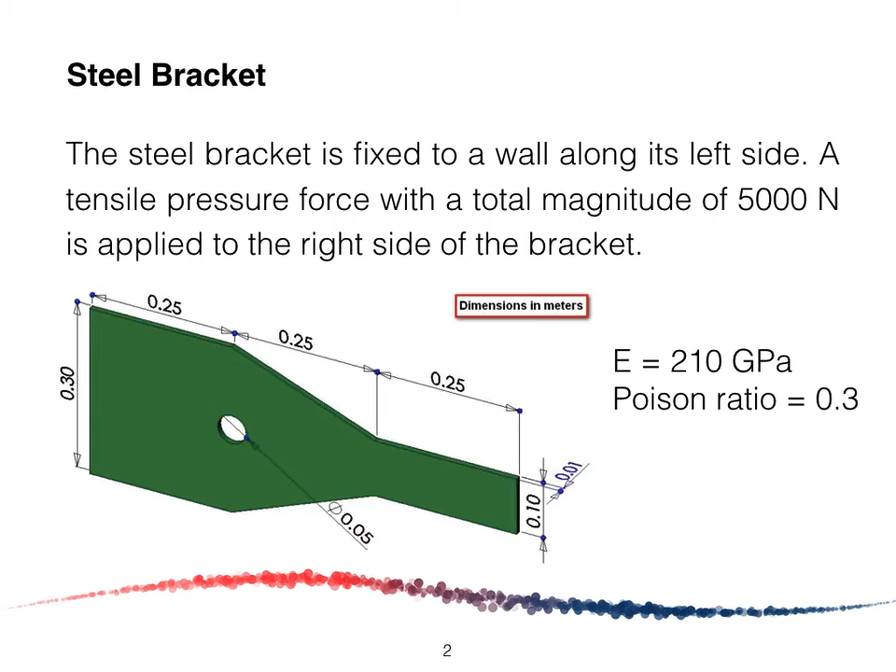So first, we are going to create our part by double-clicking on the parts and we name it as plan. Modeling space is 2D planar, type is deformable, and the base feature is shell. Approximate size is 5. So in this case, we have sketched the bracket with the symmetric horizontal position.

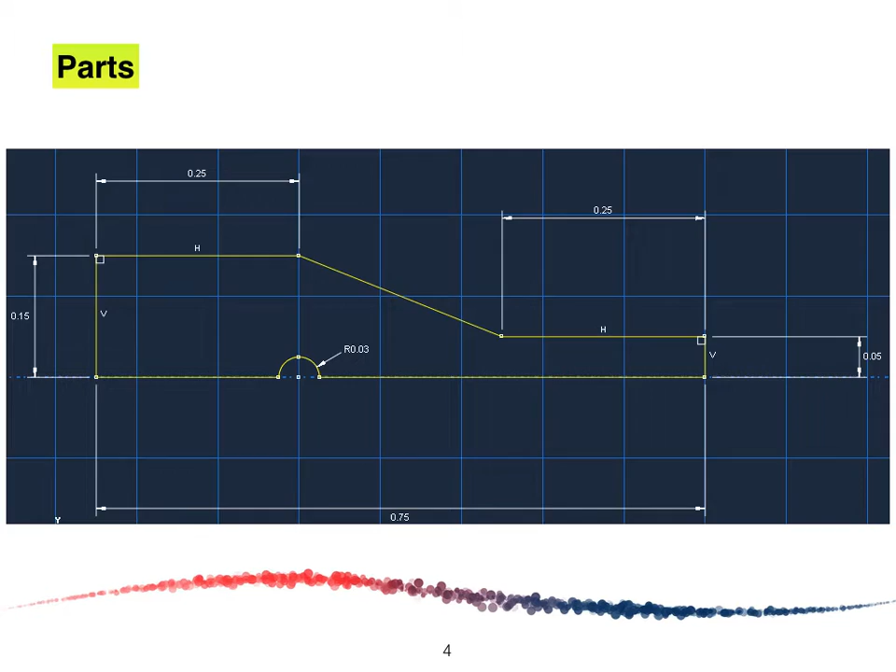So next, we are going to define our material. In this case, we double click on the materials and the edit material window will appear. Click on mechanical, elasticity, followed by elastic. So we may specify the Young's modulus and Poisson ratio in the example here.

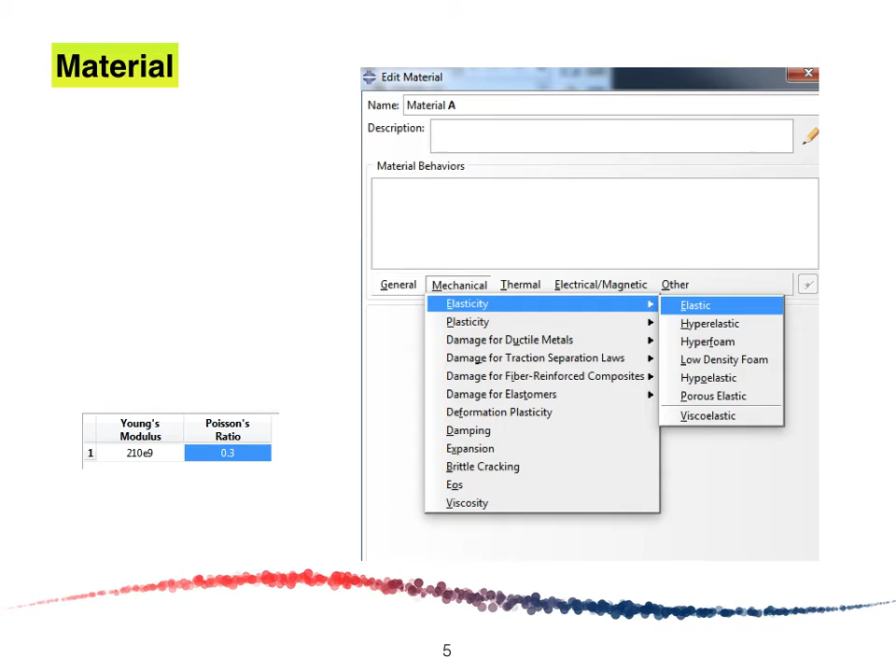So the next part is double click on the section assignment, select the whole plate and click continue. After we click continue, edit section assignment will appear. Click on the section and the create section window will appear. We are going to select solid with homogeneous. This is because the bracket has thickness and this will specify the thickness we require.

So after that we click continue and the edit section window will appear here. We are going to tick the plane stress/strain thickness and specify the thickness which is required in the question. After that click OK. Once you have clicked OK, the edit section assignment will appear here again. In this case, the type and the material are specified and we click OK.

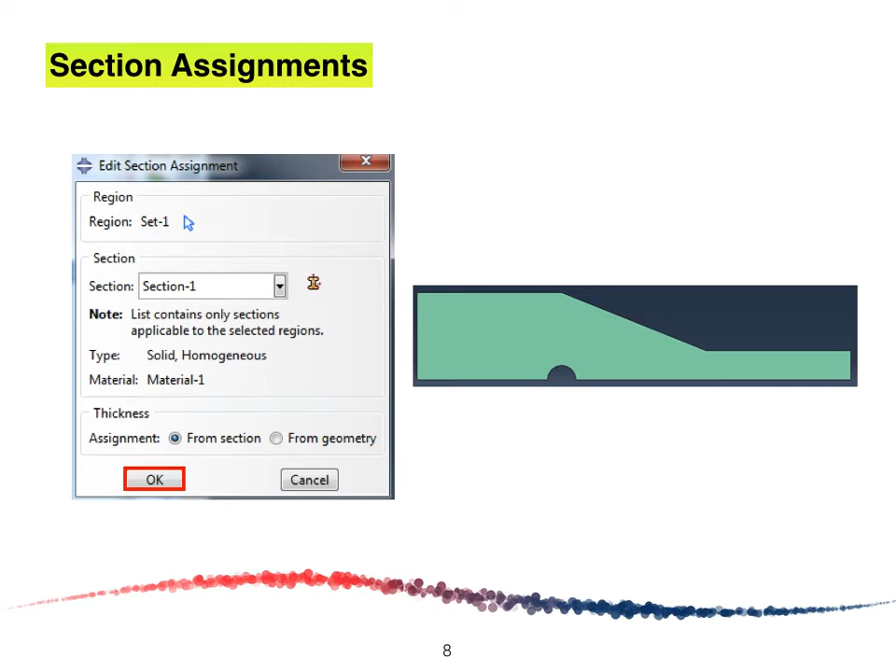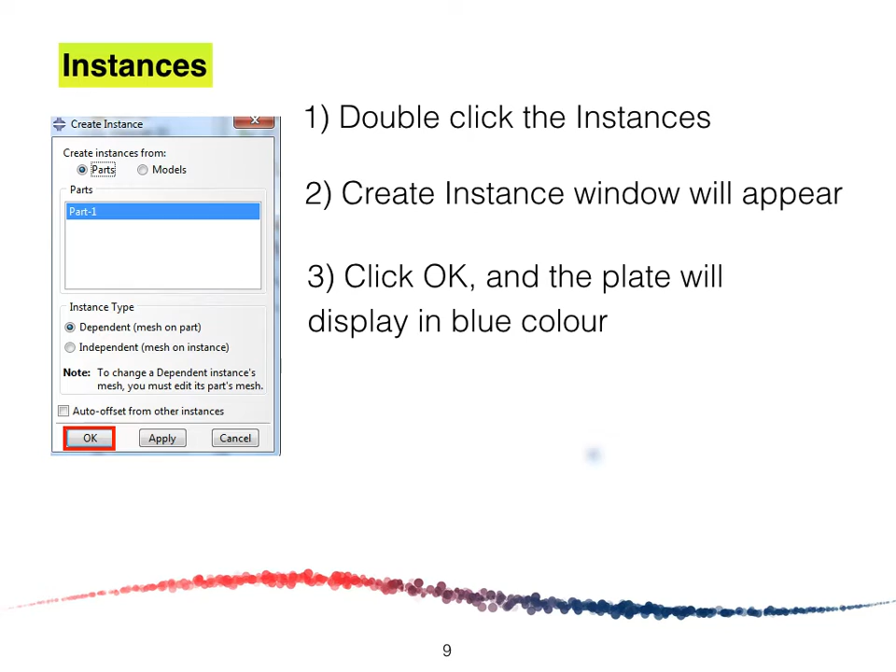So once we click OK, the bracket will appear on your screen if everything is properly defined. Next is to double click the instances and the create instance window will appear on your screen. We click OK and the plate will display in blue color.

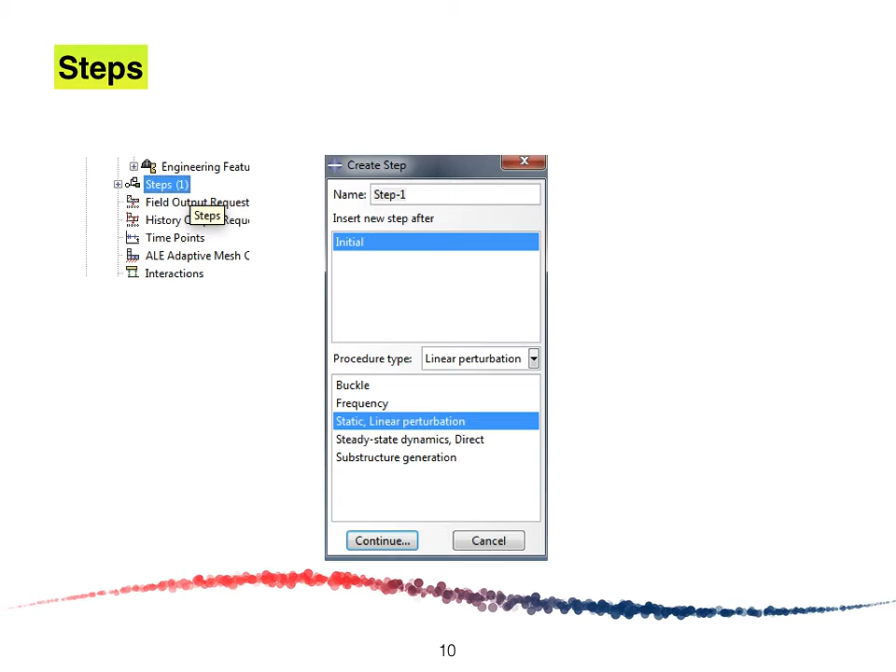So the next step is to define the step. Double click on the step and the create step window will appear. We select linear perturbation and select static. This is because before we create our load, we need to create this step first. Click continue. After we click continue, the step window will appear here and click OK.

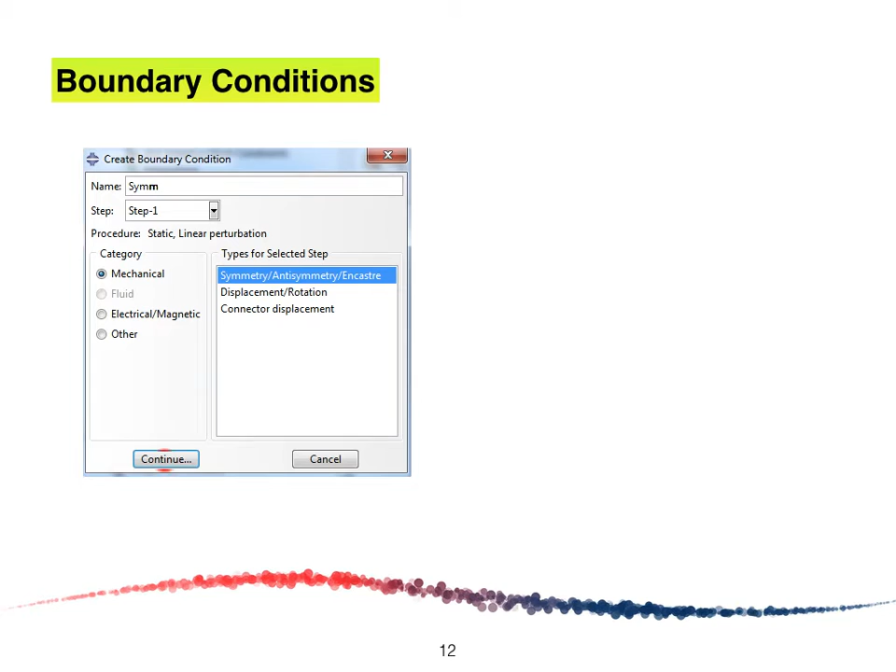So next is to define our boundary condition. The first boundary condition is the symmetry about the horizontal axis. Select mechanical and symmetry, click continue. Then we select the two horizontal lines as indicated by the red arrow and click done. The edit boundary condition window will appear, and we are going to select the Y symmetry.

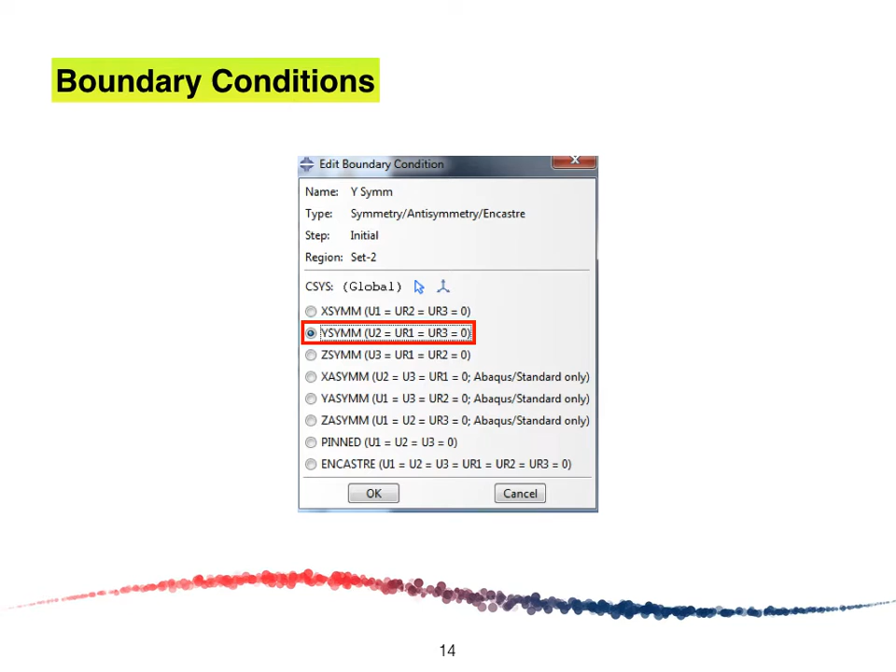This is because the bracket is symmetric about the horizontal axis and it will only move in the horizontal direction but not the vertical direction. Since it does not move in the vertical direction, U2 should be equal to 0. So therefore we select Y symmetry followed by OK.

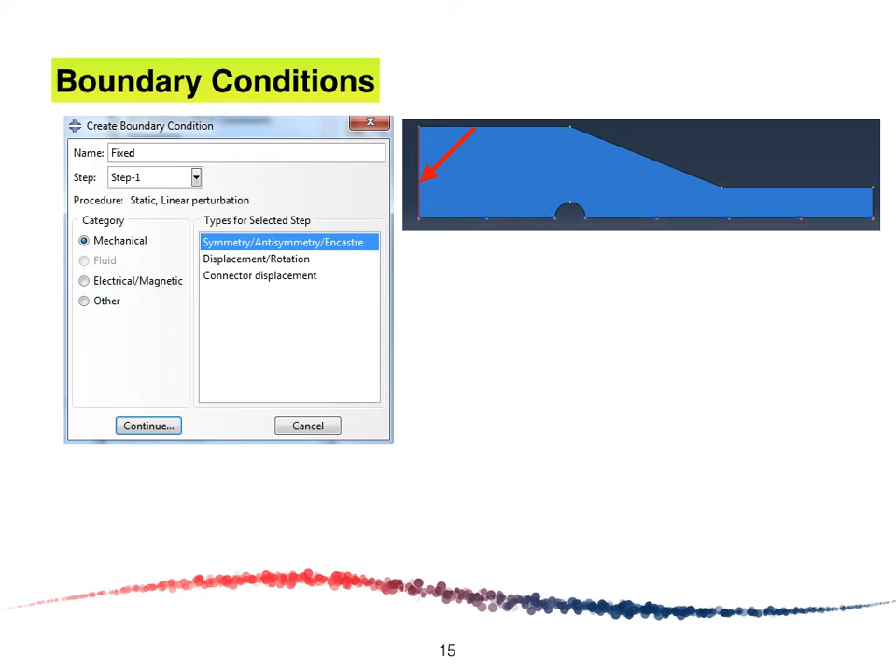So the next boundary condition is to apply the fixed point. We name it as fixed, followed by symmetry, and click continue. We select the far left hand side of the bracket, and in the edit boundary condition window, we select encastre. This is because all the XYZ directions on the far left hand side are fixed. So therefore we select encastre followed by OK.

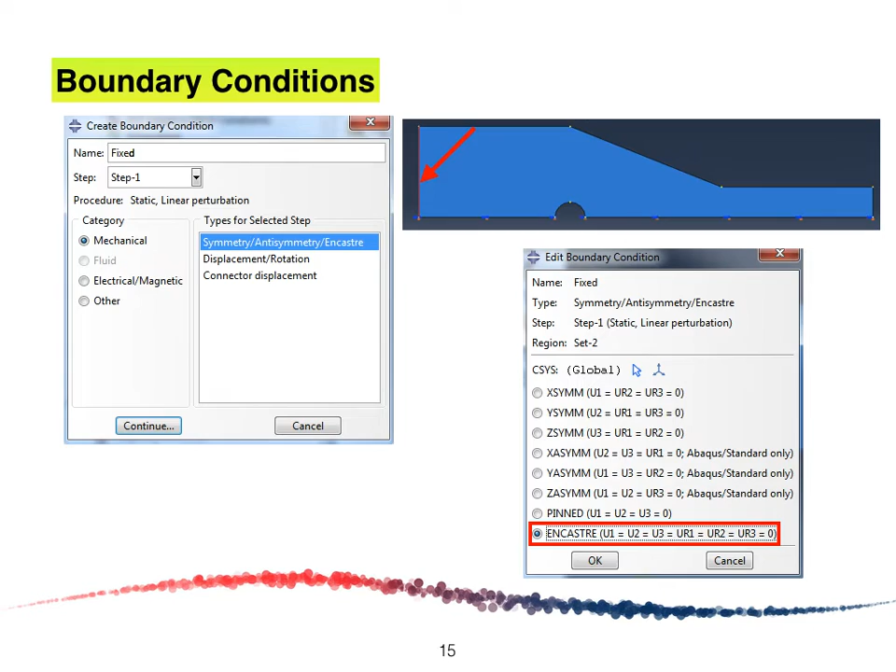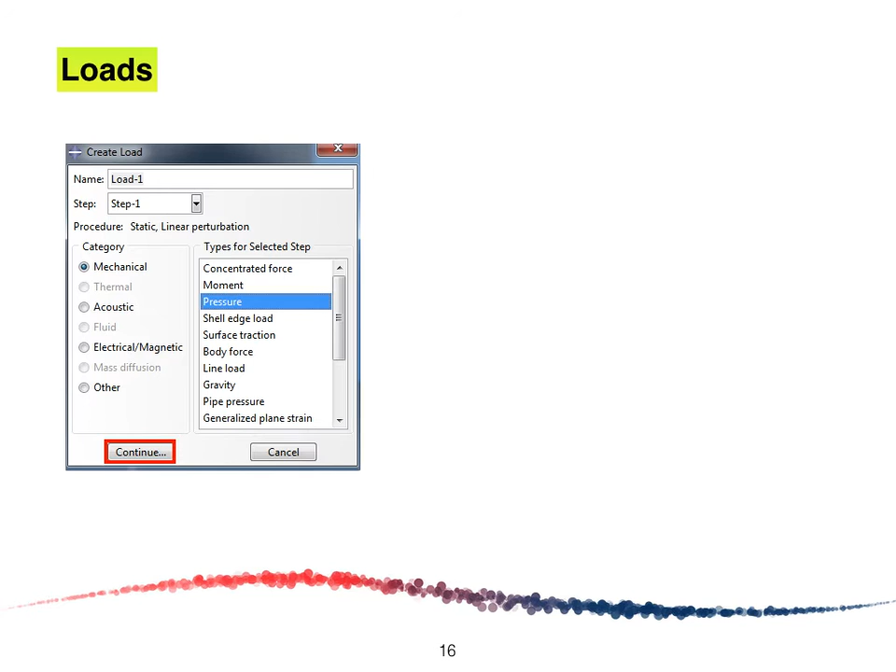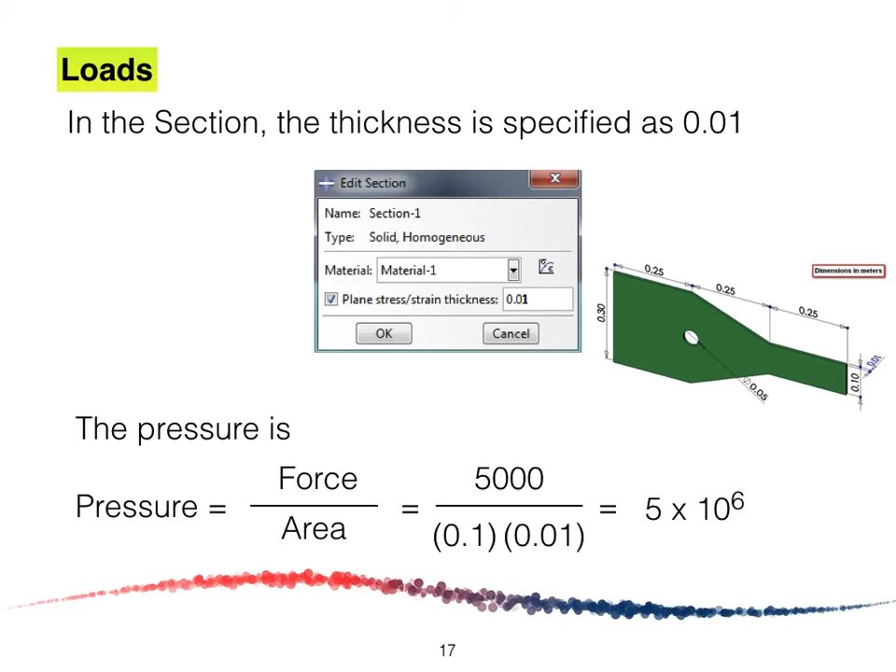So the magnitude we specify in the edit load window is -5E6, and we click OK.

The next part is to mesh our bracket. We click on the parts and the global seed window will appear. I selected the global seed window because I specified the element size as 0.005 meters for the whole structure. If you want to specify more elements on a curve, you may click on seed edge and specify the element number you require, then define the remaining lines' number of elements as well. In this case, I'm going to use global seed.

The global seed dimension element size is 0.005, and click OK.

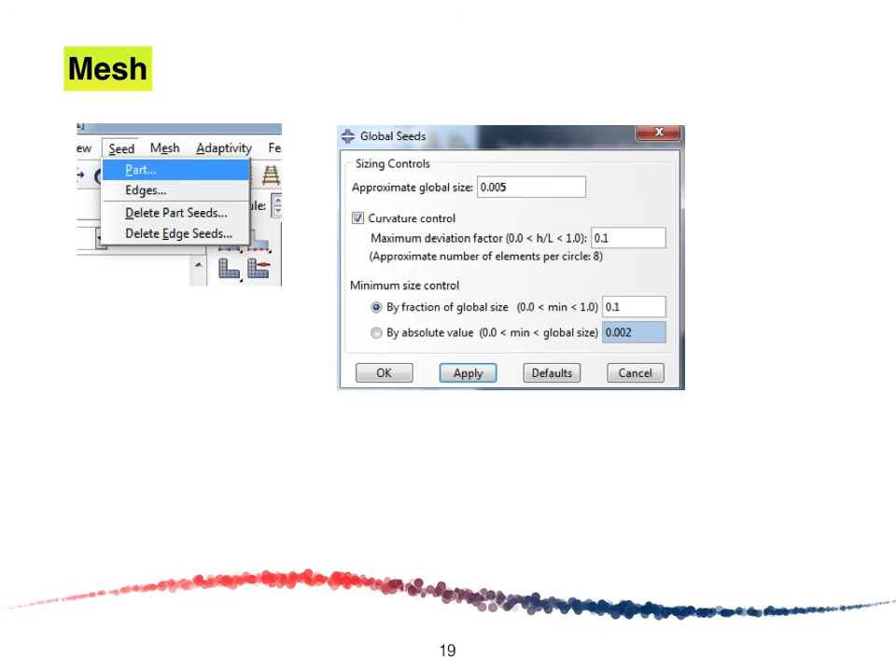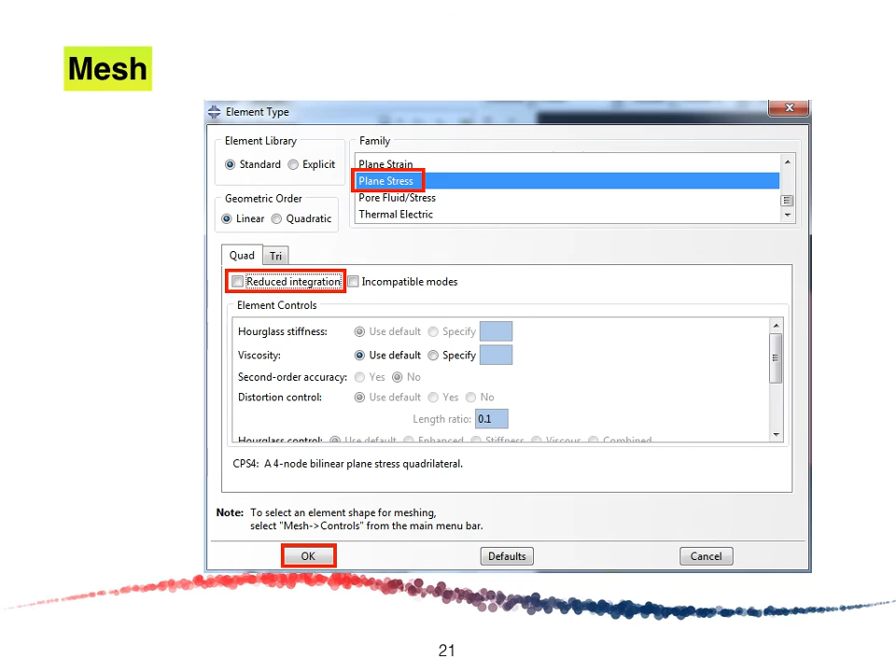After this step, we are going to define our element type. Select the whole plan and follow with done. The element type window will appear on your screen. In this case, we are going to select plane stress and untick reduced integration, followed by OK, and finally click done.

After that, we are going to mesh our bracket and click yes. On your screen it will appear the mesh element. You will realize that the mesh here is randomly produced because we have selected the free mesh technique.

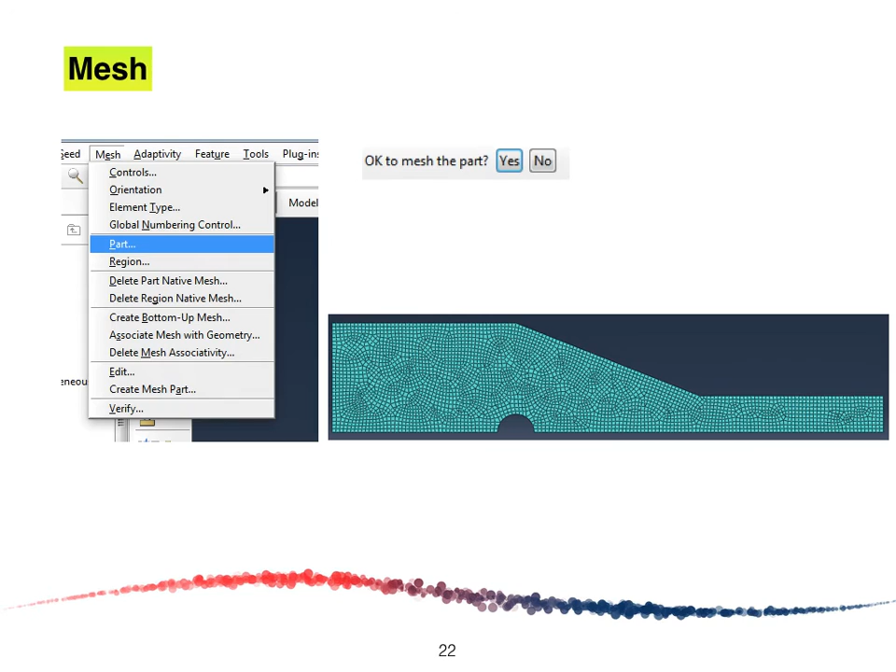The next step is to create our job and submit the model to perform our analysis. After the job is complete, we may review the result. The first result is Von Mises stress. We will realize that the maximum stress occurs at the corner of the structure. This is the plane stress we have defined in the element type.

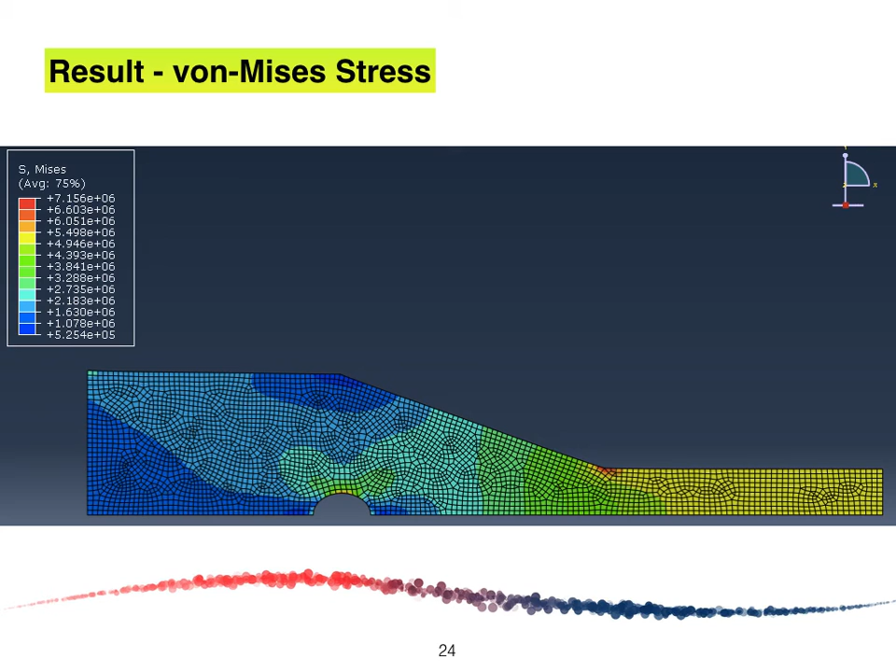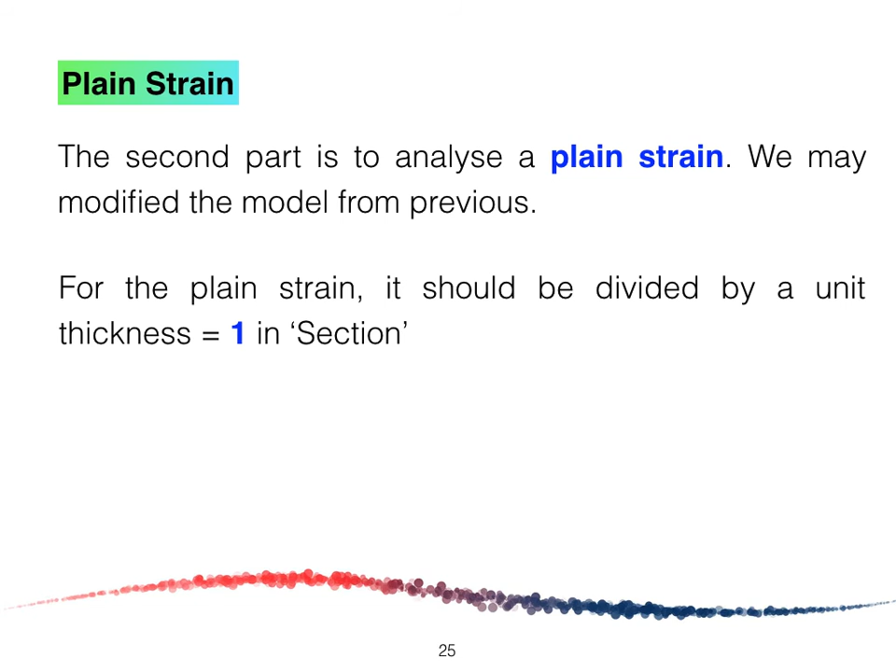The next example uses plane strain. In this case, we know that plane strain should be divided by a unit thickness equal to 1 in the section. So we go back into the section and change the plane stress thickness to 1.

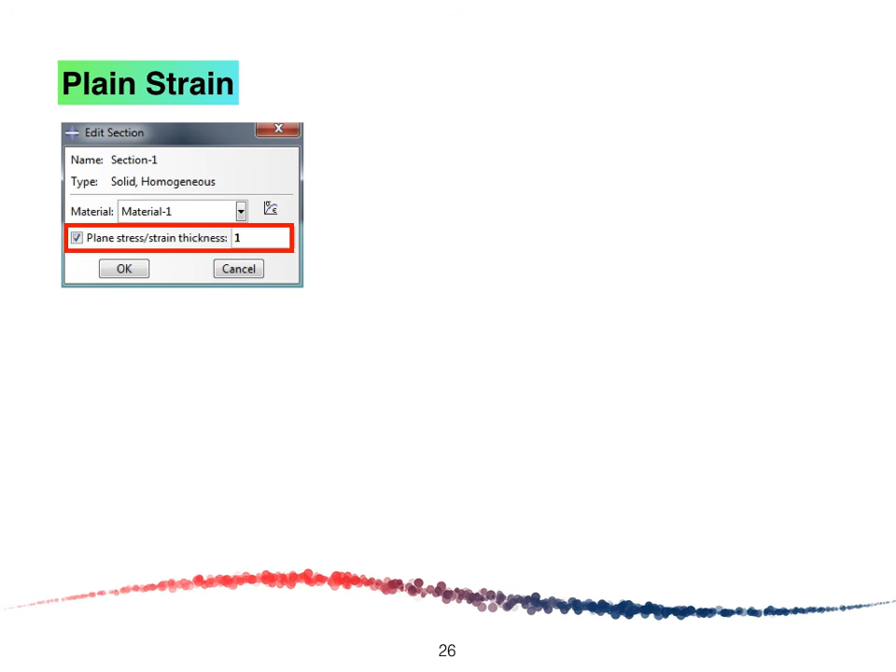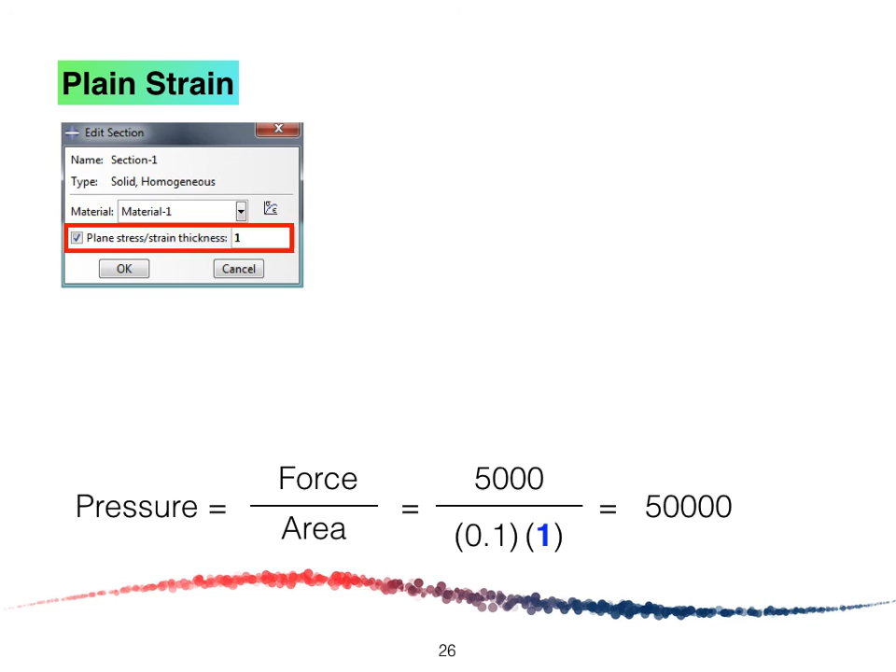We also know that the pressure of the structure is force over area. The force is 5 kilonewton, the width is 0.1, and the thickness we specify here is 1 rather than 0.01, because in the edit section we specify the thickness as 1 unit. Therefore, the pressure is 50 kilopascal. So in the load condition, we are going to change it to 50 kilopascal.

The next step we are going to change is the element type. We are going to select plane strain, followed by OK and done.

Everything has been set. So you may create a job, analyze and perform the result.

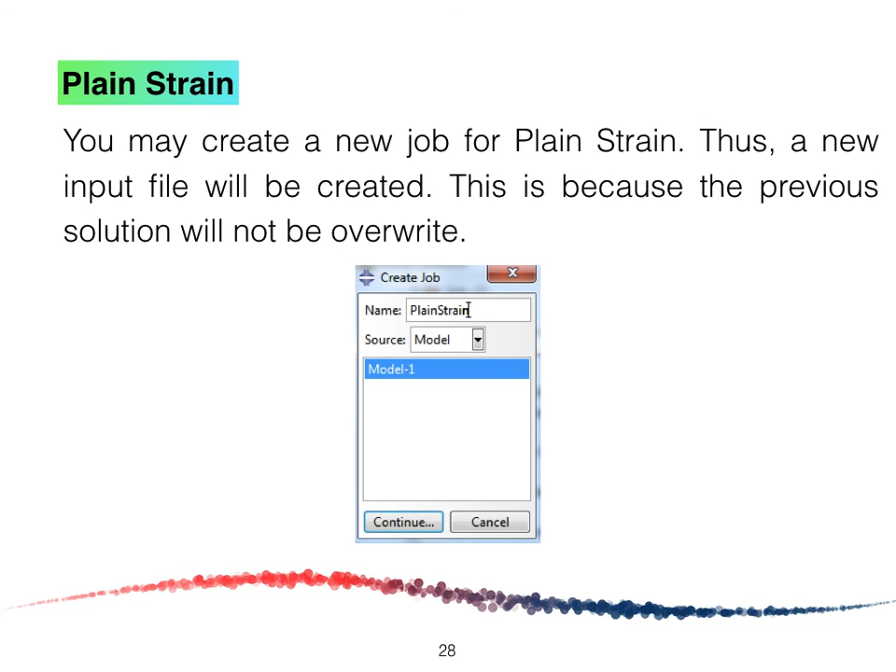In this case, I'm going to create a new job named plane strain. This is because the previous solution will not be overridden. So submit the job to be analyzed. Once completed, we may review the result.

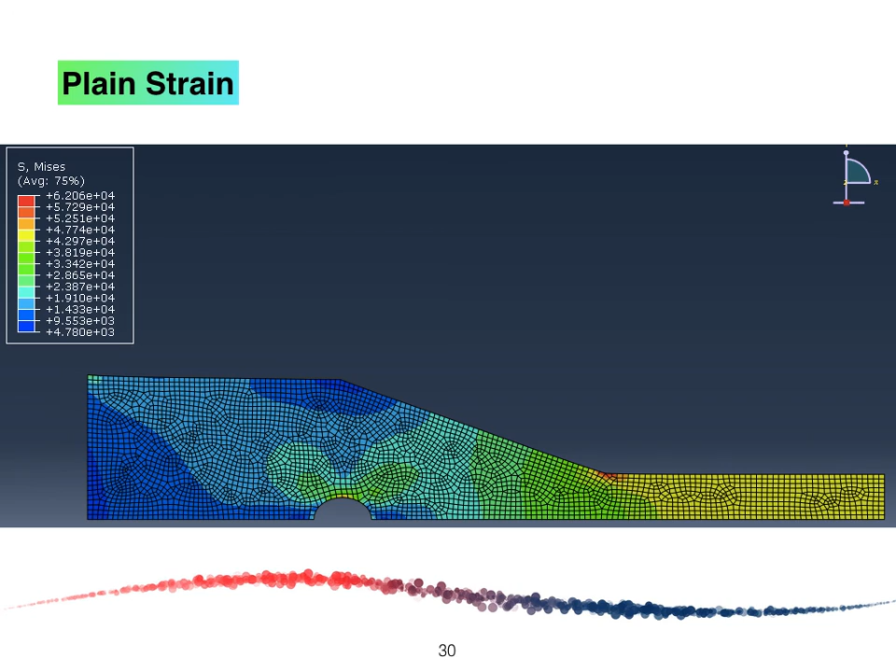In this case, the result is displayed as Von Mises again, but the difference between using plane strain and plane stress is the magnitude of the two examples, which differs by their thickness. For plane strain, the thickness is considered as 1 unit thickness. Therefore, the power of the Von Mises stress is 10 to the power 4 rather than 10 to the power 6.